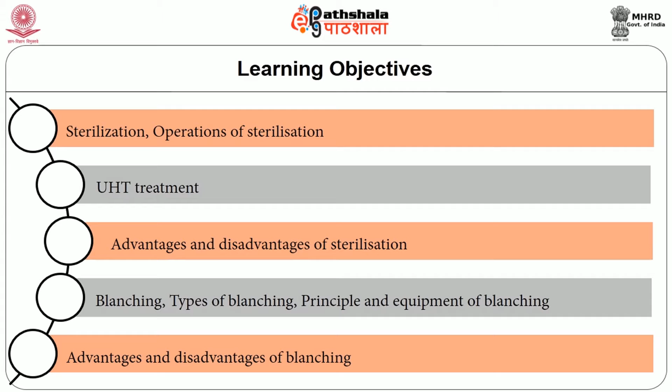Sterilization and blanching. After going through this session, you will be able to understand what is sterilization, the operations of sterilization, what is UHT treatment, advantages and disadvantages of sterilization, what is blanching, types of blanching, the principles and equipments used for blanching, and the advantages and disadvantages of blanching.

Sterilization is the complete destruction of microorganisms, accounting for the resistance of certain bacterial spores to heat. This frequently means treatment of at least 121 degrees Celsius of wet heat for 15 minutes. It also means that every particle of the food must receive this heat treatment.

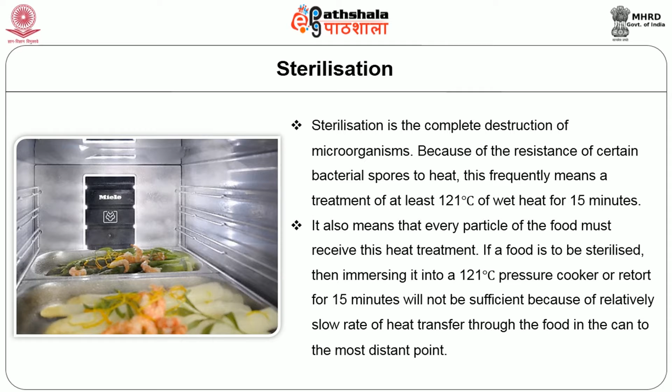If a food is to be sterilized, then immersing it into a 121 degrees Celsius pressure cooker or retort for 15 minutes will not be sufficient, because of the relatively slow rate of heat transfer through the food in the can to the most distant point.

Commercially sterile is a term that describes a condition that exists in most of the canned or bottled products manufactured under good manufacturing practices, procedures and methods. These products generally have a shelf life of 2 years or more.

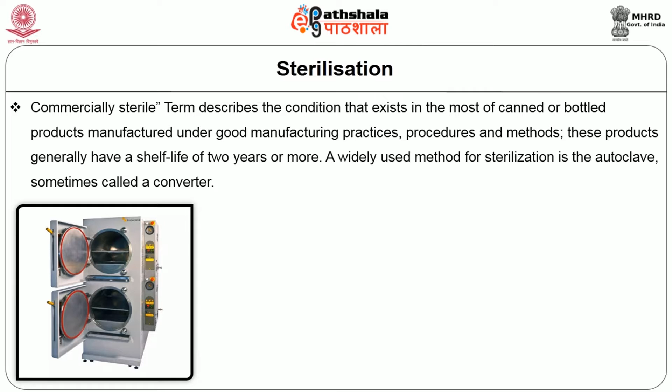A widely used method for sterilization is the autoclave, sometimes called a converter. Autoclaves commonly use steam heated to 121 to 134 degrees Celsius.

To achieve sterility, a holding time of at least 15 minutes at 121 degrees Celsius or 3 minutes at 134 degrees Celsius is required. Additional sterilizing time is usually required for liquids and instruments packed in layers of cloth, as they may take longer to reach the required temperature.

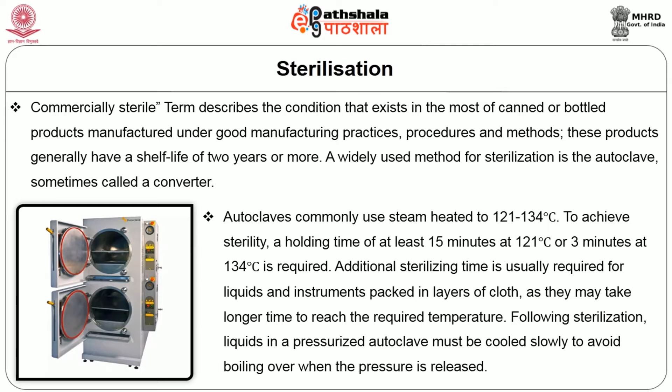Following sterilization, liquids in a pressurized autoclave must be cooled slowly to avoid boiling over when the pressure is released. Proper autoclave treatment will inactivate all fungi, bacteria, viruses and also bacterial spores, which can be quite resistant. It will not necessarily eliminate all prions.

For prion elimination, various recommendations state 121 to 134 degrees Celsius for 60 minutes, or 134 degrees Celsius for at least 18 minutes is required. The disease-causing agent is inactivated relatively quickly by such sterilization procedures.

For a significant margin of safety, cleaning should reduce the infectivity by 4 logs, and the sterilization method should reduce it by a further 5 logs. To ensure the autoclaving process was able to cause sterilization, most autoclaves have meters and charts that record or display pertinent information such as temperature and pressure as a function of time.

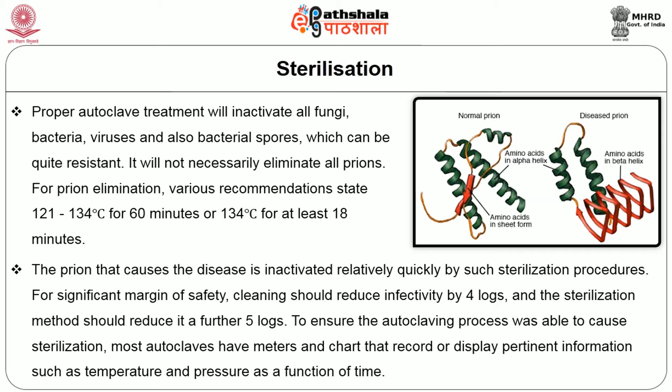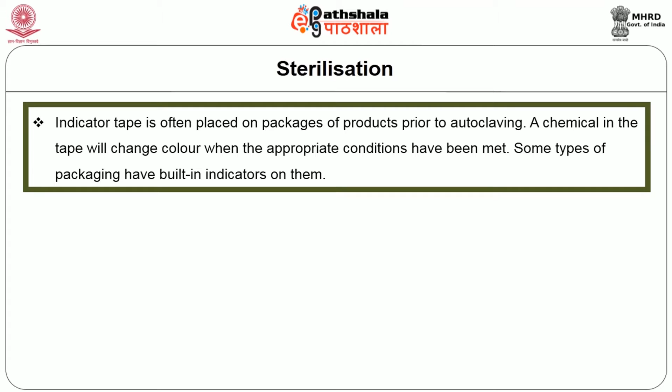Indicator tape is often placed on packages of products prior to autoclaving. A chemical in the tape will change color when the appropriate conditions have been met. Some types of packaging have built-in indicators on them.

Biological indicators can also be used to independently confirm autoclave performance. Simple bioindicator devices are commercially available based on microbial spores. Most contain spores of the heat-resistant microbe Geobacillus stearothermophilus, among the toughest organisms for an autoclave to destroy. Typically, these devices have a self-contained liquid growth medium and a growth indicator. After autoclaving, the internal glass ampule is shattered, releasing the spores into the growth medium.

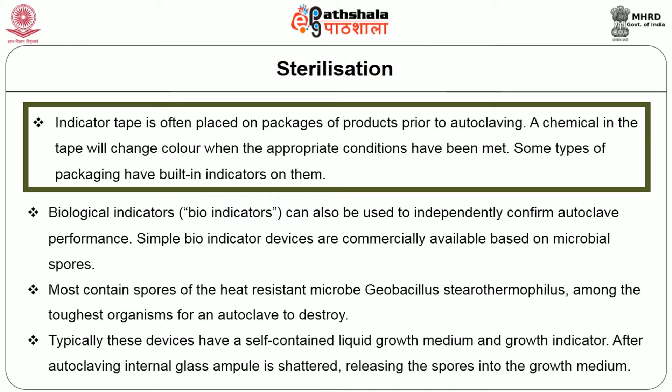The vial is then incubated at 56 degrees Celsius for 24 hours. If the autoclave destroyed the spores, the medium will remain its original color. If autoclaving was unsuccessful, the Bacillus stearothermophilus will metabolize during incubation, causing a color change.

For effective sterilization, the steam needs to penetrate the autoclave load uniformly, so an autoclave must not be overcrowded, and the lids of bottles and containers must be left ajar.

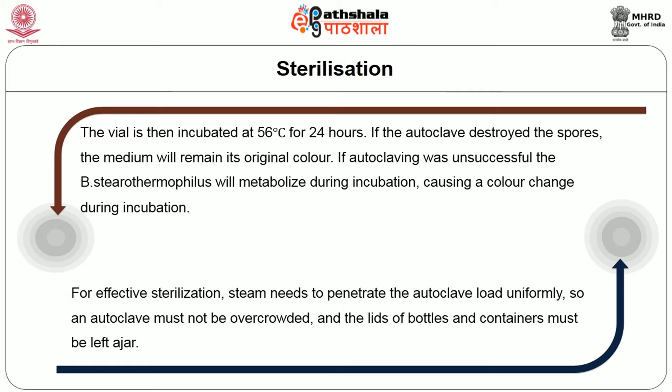Alternatively, steam penetration can be achieved by shredding the waste in some autoclave models, which also renders the end product unrecognizable. During the initial heating of the chamber, residual air must be removed. Indicators should be placed in the most difficult places for the steam to reach, to ensure the steam actually penetrates there.

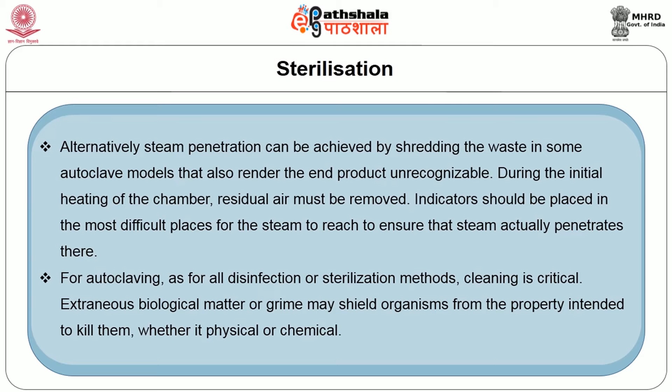For autoclaving, as for all disinfection or sterilizing methods, cleaning is critical. Extraneous biological matter or grime may shield organisms from the process intended to kill them, whether physical or chemical. Cleaning can also remove a large number of organisms.

Proper cleaning can be achieved by physical scrubbing. This should be done with detergent and warm water to get the best result. When cleaning instruments or utensils with organic matter, cool water must be used, because warm or hot water may cause organic debris to coagulate. Treatment with ultrasound or pulsed air can also be used to remove the debris.

Although imperfect, cooking and canning are the most common application of heat sterilization. Boiling water kills the vegetative stage of all the common microbes. Roasting meat until it is well done typically completely sterilizes the surface.

Since the surface is also the part of the food most likely to be contaminated by microbes, roasting usually prevents food poisoning. The common methods of cooking foods do not sterilize the food.

They simply reduce the number of disease-causing microorganisms to a level that is not dangerous for people with normal digestive and immune systems. Pressure cooking is analogous to autoclaving and, when performed correctly, renders food sterile.

However, some foods are notoriously difficult to sterilize with home canning equipment, so expert recommendations should be followed for home processing to avoid food poisoning.

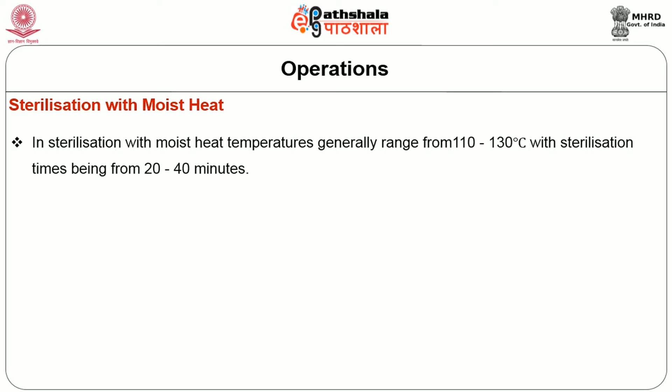Sterilization with moist heat: temperatures generally range from 110 to 130 degrees Celsius, with sterilization times being from 20 to 40 minutes. For example, canned foods are sterilized in an autoclave at about 121 degrees Celsius for 20 minutes.

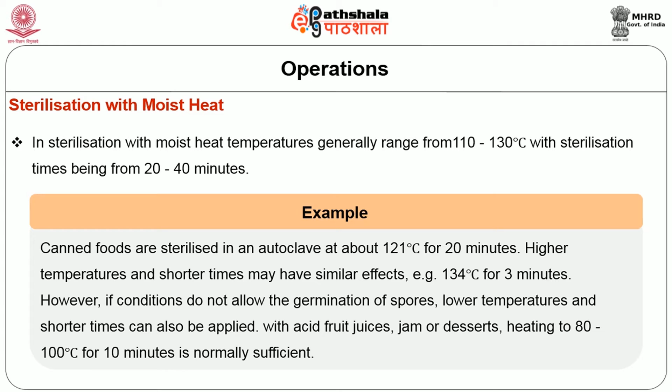Higher temperature and shorter times may have similar effects, for example 134 degrees Celsius for 3 minutes. However, if conditions do not allow the germination of spores, lower temperature and shorter time can also be applied. For example, with acid fruit juices, jam or desserts, heating at 80 to 100 degrees Celsius for 10 minutes is normally sufficient.

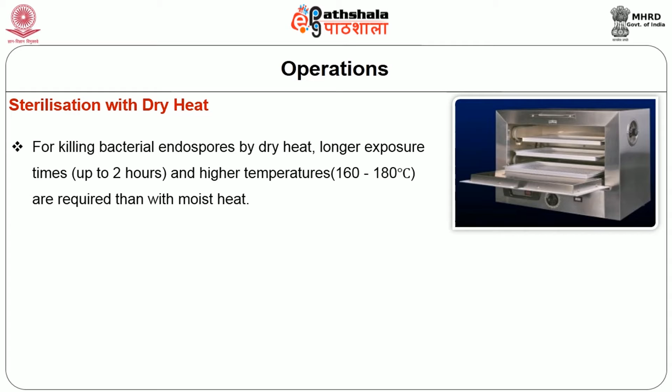Then, sterilization with dry heat. For killing bacterial endospores by dry heat, longer exposure times and higher temperatures are required compared with moist heat.

Sterilization by chemical means can also be applied, using ethylene oxide, which is used to sterilize food, plastics, glassware and other equipment.

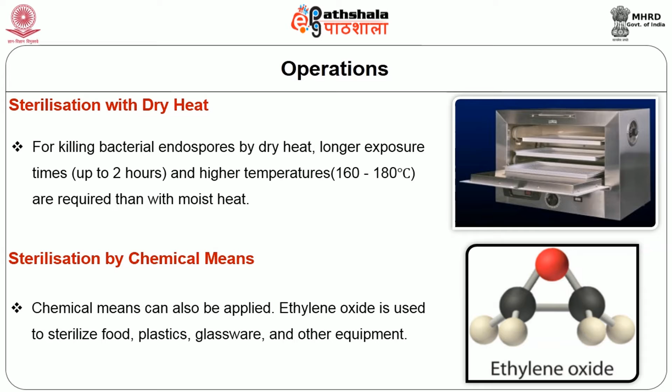Next is ultra high temperature treatment. This means a very short treatment at a temperature of approximately 140 degrees Celsius for only a few seconds. This results in a sterilized product with minimal heat damage to the product's properties.

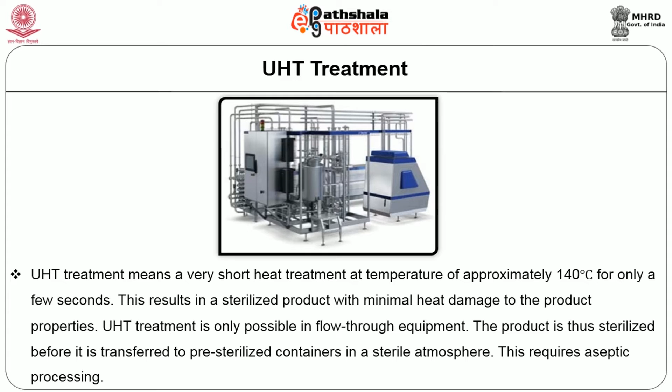UHT treatment is only possible in flow-through equipment. The product is thus sterilized before it is transferred to pre-sterilized containers in a sterile atmosphere. This requires aseptic processing.

There are two principal processes of UHT treatment: one is direct heating and the other is indirect heating. The first is direct heating.

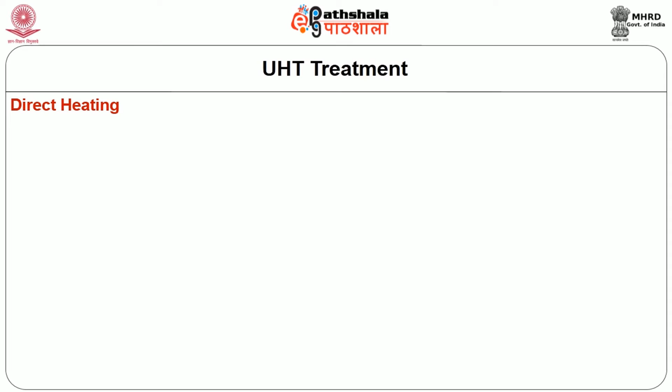The product is heated by direct contact with steam of potable and culinary quality. The main advantage of direct heating is that the product is held at elevated temperature for a shorter period of time. For a heat sensitive product like milk, this means less damage.

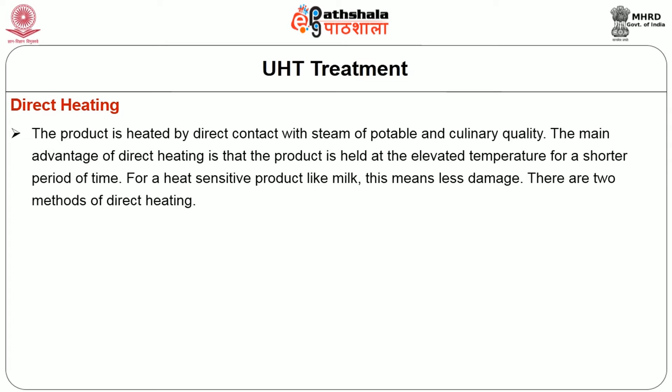There are two methods of direct heating: injection and infusion. In the injection method, high pressure steam is injected into preheated liquid by a steam injector, leading to a rapid rise in temperature. In the infusion method, the liquid product stream is pumped through a distributing nozzle into a chamber of high pressure steam.

The next is indirect heating. The heating medium and the product are not in direct contact but are separated by equipment contact surfaces. Several types of heat exchangers are applicable for this method. The first one is the plate heat exchanger.

This method is economical in floor space, easily inspected, and allows for potential regeneration.

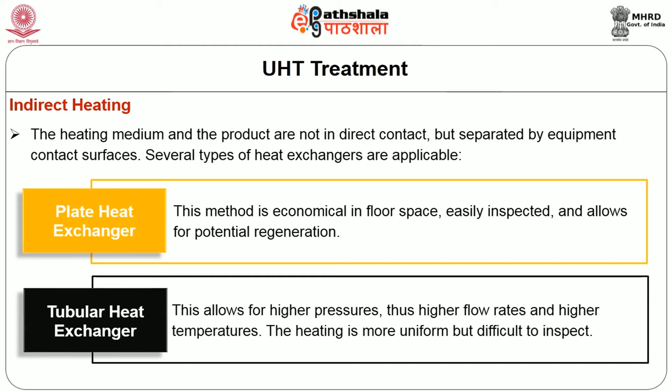The next is the tubular heat exchanger. It allows for high pressures, thus higher flow rates and high temperatures. The heating is more uniform but difficult to inspect.

The next is the scraped surface heat exchanger. The product flows through a jacketed tube which contains a heating medium and is scraped from these sides with a rotating knife.

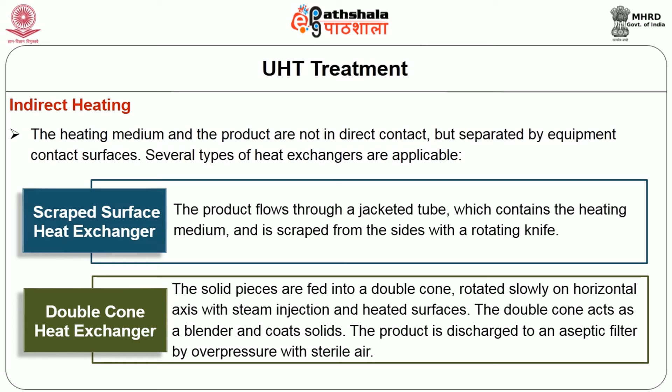Next is the double cone heat exchanger. The solid pieces are fed into the double cone. These are rotated slowly on a horizontal axis with steam injection and heated surfaces. The double cone acts as a blender and coats solids. The product is discharged to an aseptic filler by overpressure with sterile air.

The advantages are that it is non-toxic and safe for the environment. Powders, soft paraffin, and glycerin can be sterilized by dry heat sterilization. It is economic and has a short processing time.

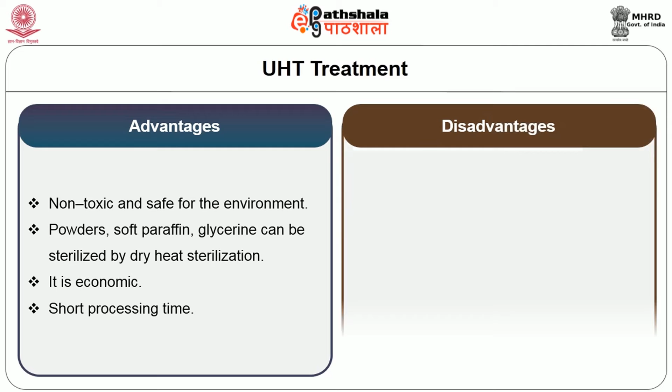The disadvantages are that it needs high heat for longer periods. The penetration of heat takes a long time in larger devices, and materials are sensitive to high heat and moisture.

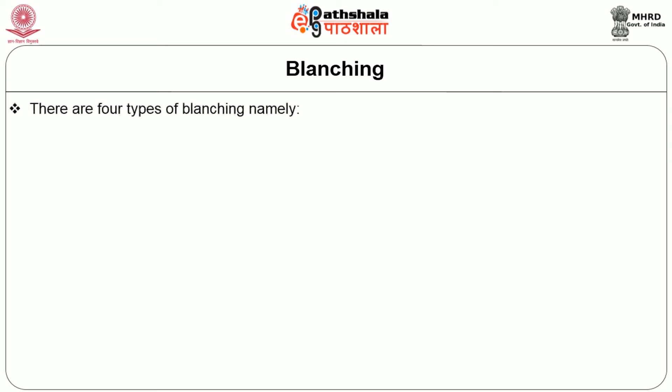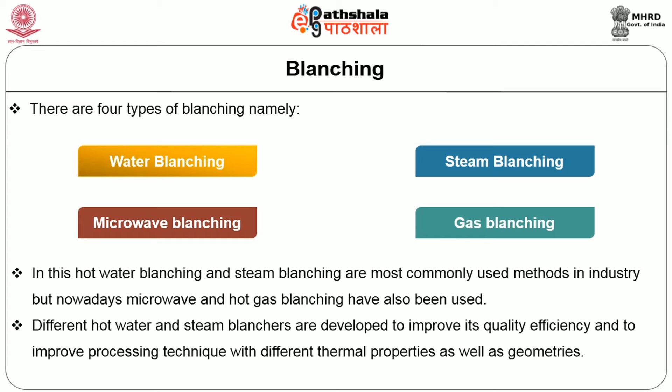The next is blanching. There are four types: water, steam, microwave, and gas blanching. Hot water and steam blanching are the most commonly used methods in industry, but nowadays microwave and hot gas blanching have also been used. Different hot water and steam blanchers are developed to improve quality, efficiency, and processing technique, with different thermal properties and geometries.

The first is water blanching. It is performed in hot water at a temperature ranging from 70 to 100 degrees Celsius, but combinations of low temperature long time and high temperature have also been used. Water blanching usually results in more uniform treatment than others.

For automatic processing, different water blanchers are developed using basically a screw or chain conveyor to transport the product inside the tank where hot water is filled. Water is heated indirectly with steam in a heat exchanger so that the steam does not need to be food grade.

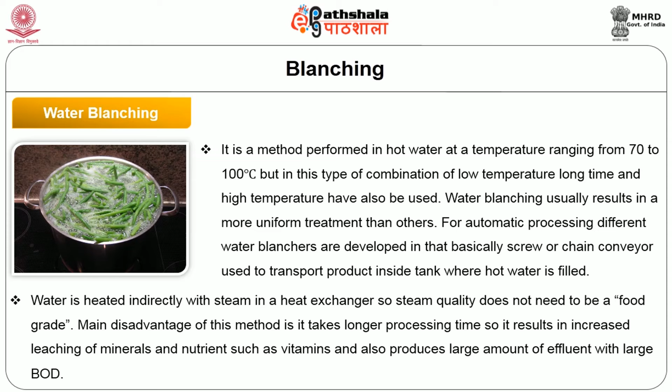The main disadvantage of this method is that it takes longer processing time, resulting in increased leaching of minerals and nutrients such as vitamins, and also produces a large amount of effluent with higher BOD.

The next is steam blanching. In this type, the product is transported by chain or screw conveyor through a chamber where food grade steam is directly injected at 100 degrees Celsius.

Steam blanching is usually used for cut and small products, requires less time than water blanching, and results in fewer losses. Due to the temperature gradient between the surface and center of food products, uneven blanching takes place, resulting in over-blanching near the surface and under-blanching in the center.

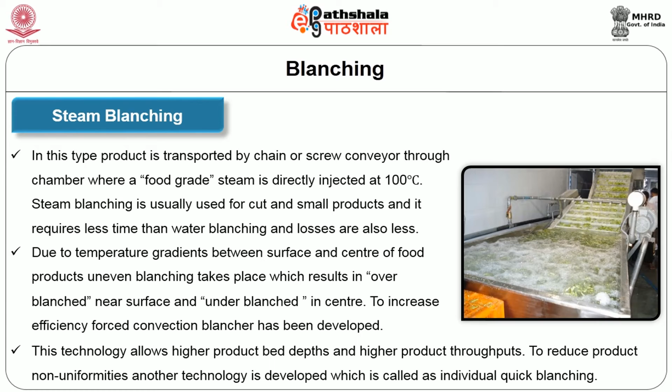To increase efficiency, forced convection blanchers have been developed. This technology allows higher product bed depths and higher product throughputs. To reduce product non-uniformities, another technology called individual quick blanching was developed.

The next is microwave blanching. It was developed because of important findings on retention of ascorbic acid and carotene, and requires a very short processing time compared to other methods. To overcome some drawbacks and disadvantages, it has been combined with water blanching.

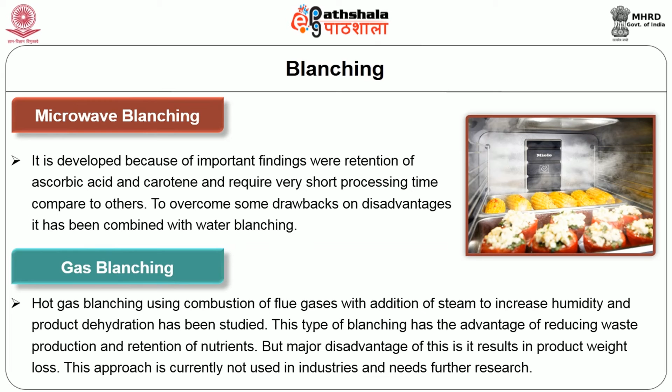The next is gas blanching. Hot gas blanching usually uses a combustion of flue gases with addition of steam to increase humidity, and product dehydration has been studied. This type of blanching has the advantage of reducing waste production and retaining nutrients, but a major disadvantage is that it results in product weight loss. This approach is currently not used in industries and needs further research.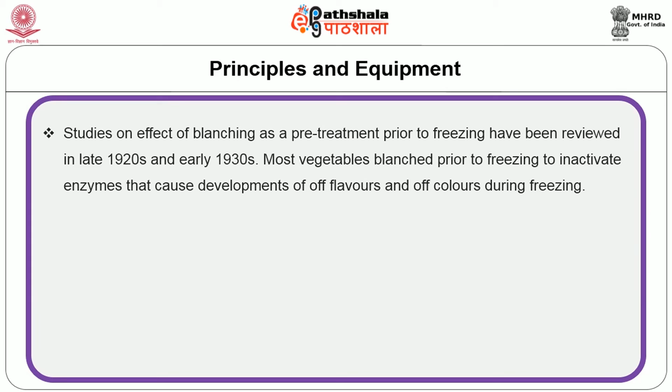The principles and equipment used for blanching, and studies on the effect of blanching as a pre-treatment prior to freezing, have been reviewed since the late 1920s and early 1930s. Most vegetables are blanched prior to freezing to inactivate enzymes that cause development of off flavors and off colors during freezing. Some exceptions include onions, peppers, and leaves, as they lose color and flavor during blanching.

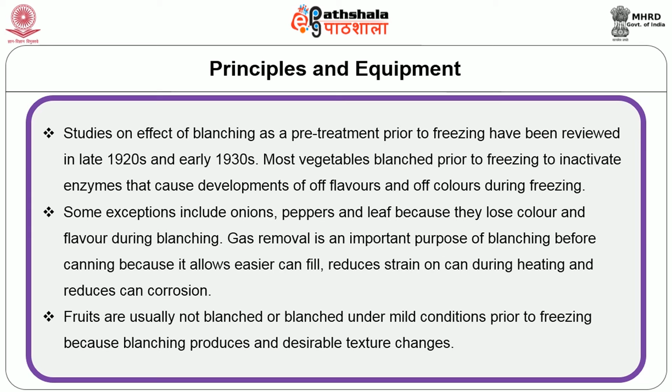Gas removal is an important purpose of blanching before canning because it allows easier can filling, reduces strain on the can during heating, and reduces can corrosion. Fruits are usually not blanched, or blanched under mild conditions, prior to freezing because blanching produces undesirable textural changes. Before drying, fruits and vegetables are sometimes blanched.

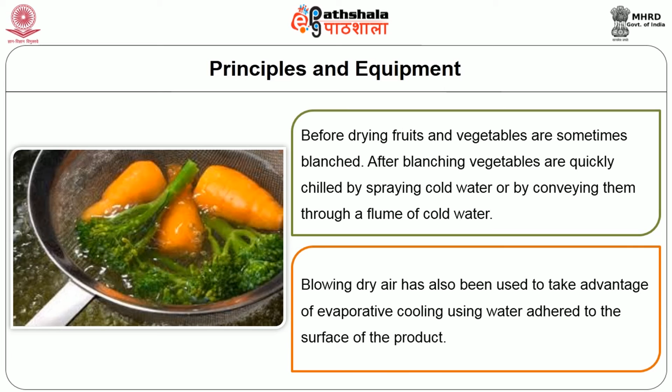After blanching vegetables, these are quickly chilled by spraying cold water or by conveying them through a flume of cold water. Blowing dry air has also been used to take advantage of evaporative cooling using water adhered to the surface of the product.

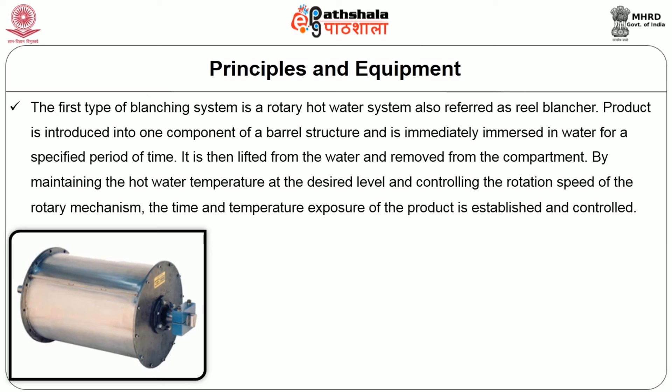The first type of blanching system is a rotary hot water system, also referred to as a reel blancher. The product is introduced into one component of a barrel structure and is immediately immersed in water for a specified period of time. It is then lifted from the water and removed from the compartment. By maintaining the hot water temperature at the desired level and controlling the rotation speed of the rotary mechanism, the time and temperature exposure of the product is established and controlled.

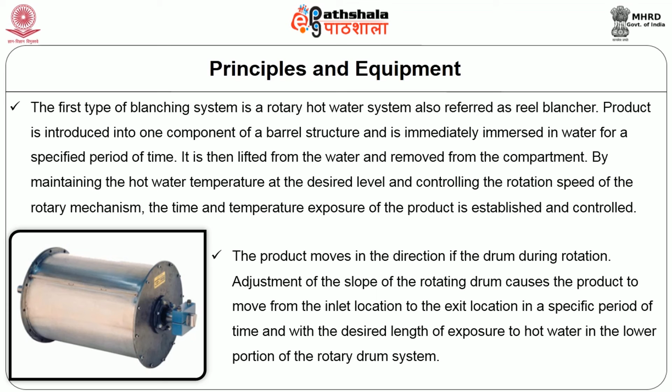The product moves in the direction of the drum during rotation. Adjustment of the slope of the rotating drum causes the product to move from the inlet location to the exit location in a specific period of time, with the desired length of exposure to the hot water in the lower portion of the rotary drum system.

Steam blanchers usually incorporate tunnels with product conveyors. The concept involves exposing the product particles to the steam environment for a specified period of time based on the conveyor speed. Considerable attention must be given to the density of the product on the conveyor in order to maintain exposure of the product surface area to the steam for the maximum time period.

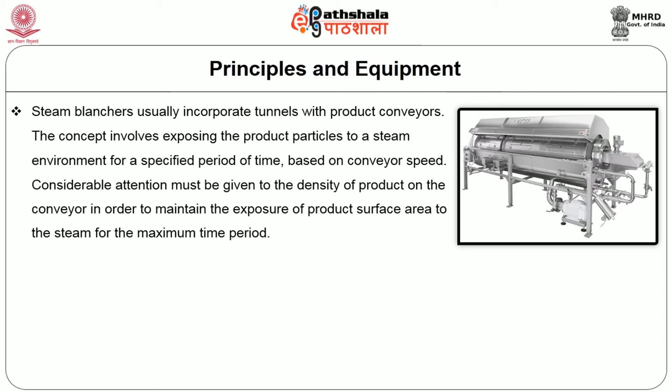In a typical steam blanching system, product is introduced into the tunnel from a water tank inlet. The product enters the water tank, and a conveyor lifts it from the water tank into the steam environment, carrying it to the opposite end where it moves upward on the conveyor. In this system, the movement of the steam or air mixture is sufficient to lift the product from the conveying surface, increasing the efficiency of heating.

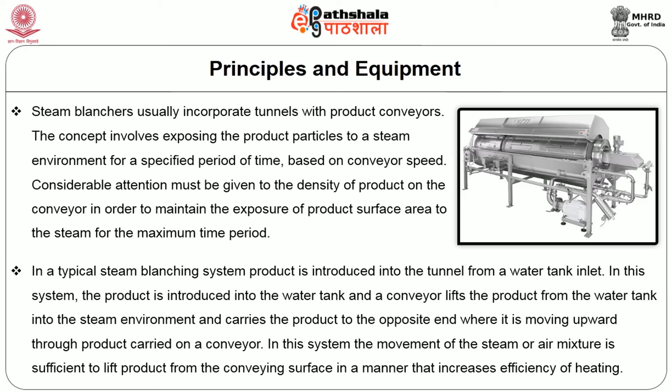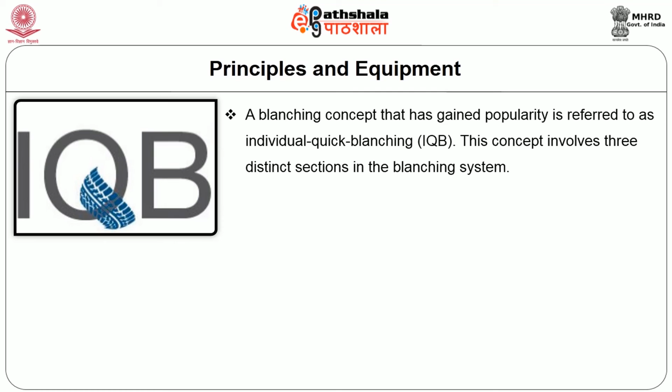A blanching concept that has gained popularity is referred to as individual quick blanching. This concept involves three distinct sections in the blanching system. The first stage, heating, utilizes either steam or water as a heating medium. A thin layer of the product on the conveyor is typically used to ensure rapid heating.

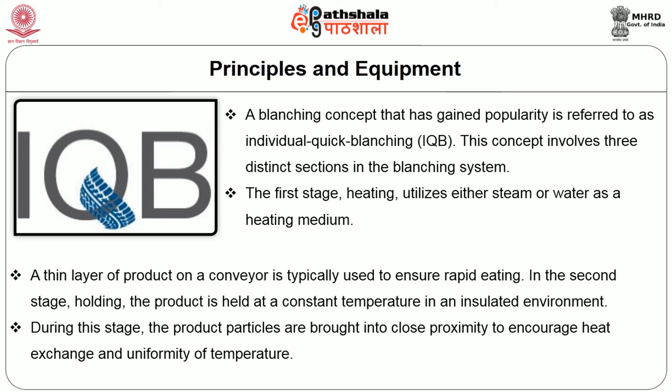In the second stage, holding, the product is held at a constant temperature in an insulated environment. During this stage, the product particles are brought into close proximity to encourage heat exchange and uniformity of temperature.

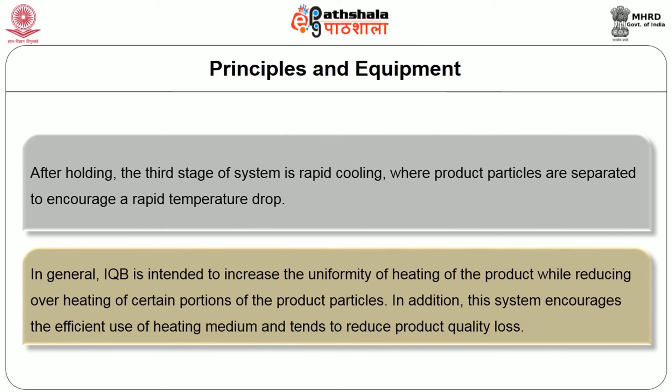After holding, the third stage of the system is rapid cooling, where the product particles are separated to encourage a rapid temperature drop. In general, individual quick blanching is intended to increase the uniformity of heating of the product while reducing overheating of certain portions of the product particles. In addition, this system encourages efficient use of the heating medium and tends to reduce quality loss.

The advantages of this method are that it inactivates most of the plant enzymes which cause toughness, discoloration, mustiness, off flavor, softening and loss of nutritive value.

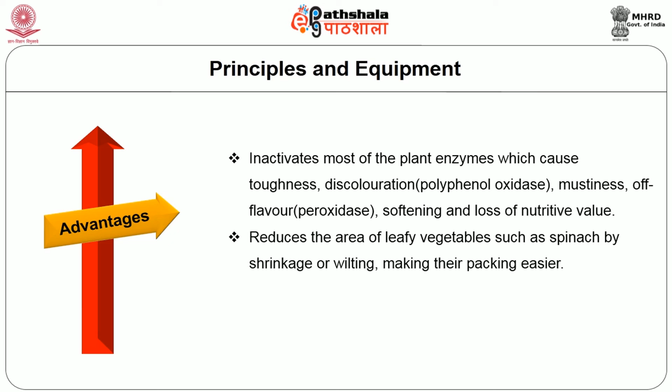It reduces the volume of leafy vegetables such as spinach by shrinkage or wilting, making packaging easier. It removes tissue gases, which reduces sulfites. It reduces the number of microorganisms by as much as 99%. It enhances the green color of vegetables such as peas, broccoli and spinach. It reduces the saponin content in peas.

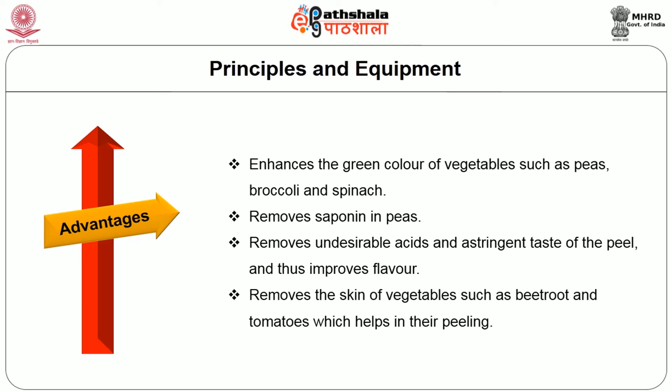It removes undesirable acids and the astringent taste of the peel, thus improving the flavor. It also removes the skin of vegetables such as beetroot and tomatoes, which helps in their peeling.

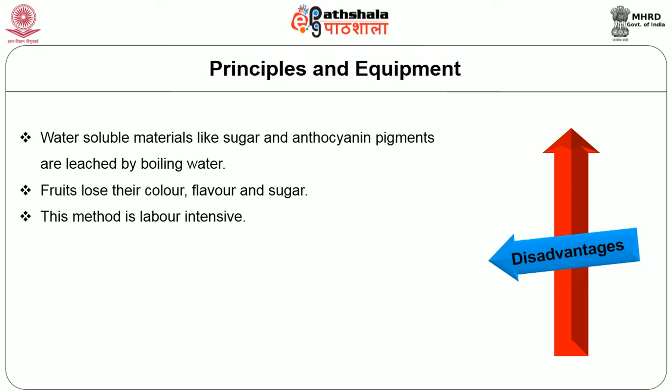The disadvantages are that water-soluble materials like sugar and anthocyanin pigments are leached out by the boiling water. Fruits lose their color, flavor and sugar. This method is labor intensive and also requires access to abundant clean water. The preserved fruits and vegetables have a lower nutritional value and generally less taste than fresh products.

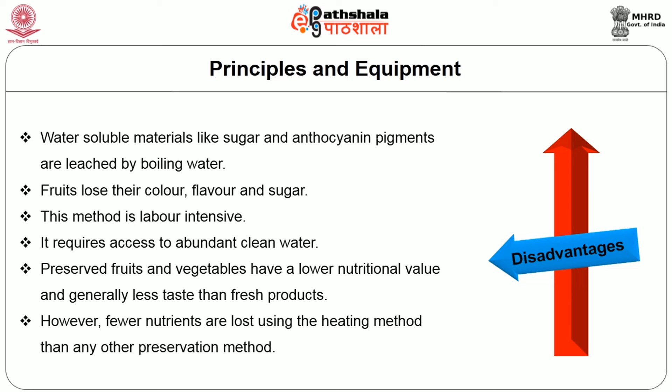However, fewer nutrients are lost using the heating method than with any other preservation method.

Let us sum up the whole thing. The main aim of food preservation is to reduce the microbial load in food products, which prevents spoilage. Sterilization and blanching are two methods of food preservation. Sterilization decreases the microbial load of food products using the ultra high temperature method. Blanching inactivates various undesirable acids and enzymes using different methods such as water blanching, steam blanching, etc.